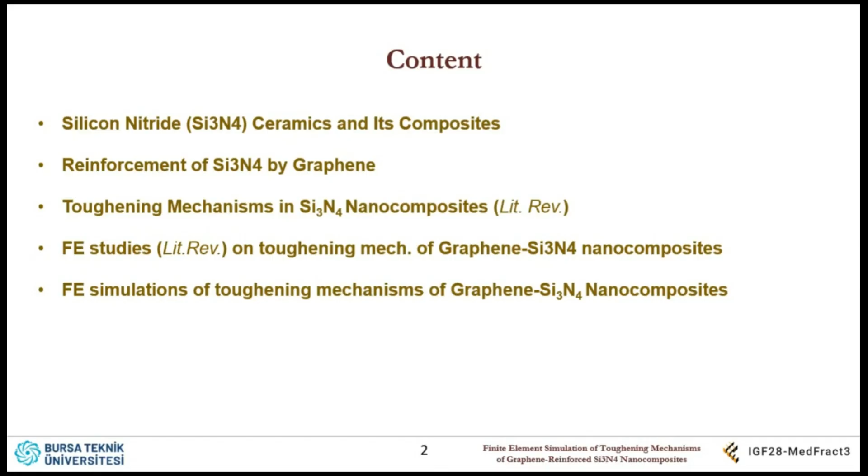So what are the advantages of silicon nitride ceramics? There are many varieties of ceramics, and the advantage of this material is it can be used in high temperature and high stress conditions. Its resistance to wear and corrosion is very good. For this reason, they are preferred in manufacturing cutting tools and internal combustion engine parts like turbochargers, exhaust gas valves, etc., and components of gas turbines, and even biomedical applications due to their long service lives.

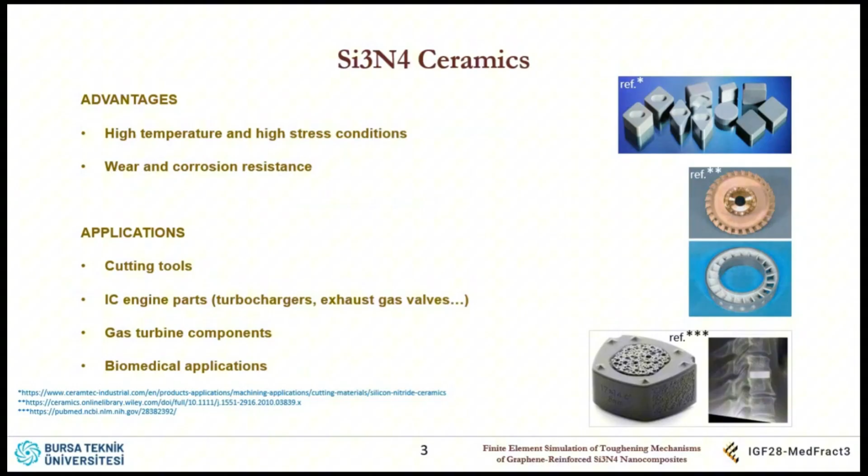So why, if this material is so good, are composites of this ceramic needed? Researchers are always after better materials, so they want tougher ceramic because it almost always has less toughness than metals.

So in order to improve the toughness, researchers manipulate grain sizes. They add some sintering additives, or they add some fillers like fibers or nanoplatelets. When they do this, they get some improvements in fracture toughness.

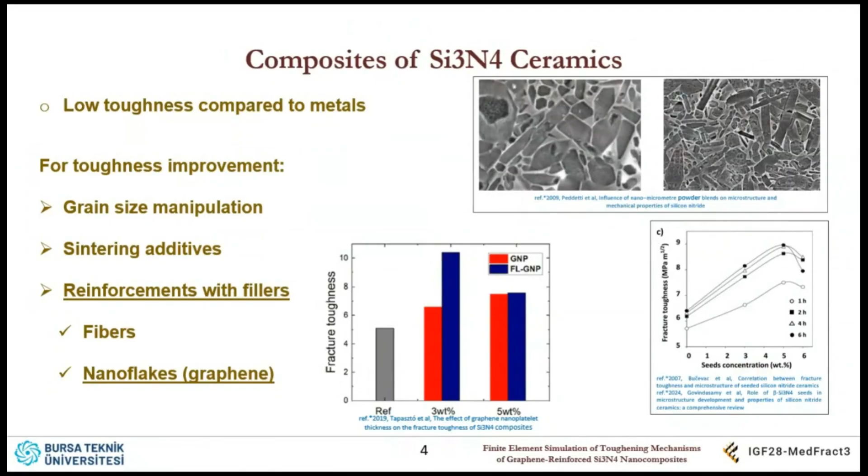However, other mechanical properties may degrade, such as Young's modulus and hardness, while the fracture toughness improves. This is a regular graphene nanocomposite microstructure, so you can see the dispersions of graphene nanoplatelets.

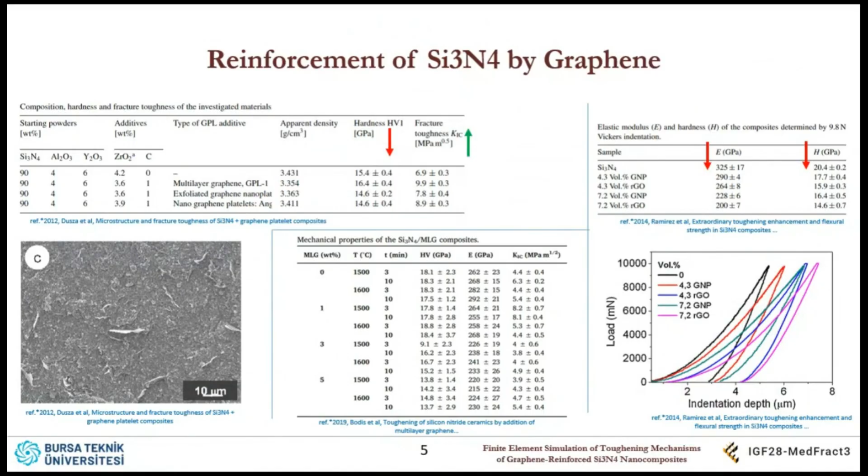In some studies, many different manufacturing parameters are applied, and you can see too many variations in the results. While you get some improvements and decreases in bending strength, you likewise get some improvements and some degradations in toughness. So the mechanical properties vary greatly from one study to another, and this makes material development studies a bit challenging.

In order to help with material development studies, toughening mechanisms should be understood. So for this reason, I want to simulate toughening mechanisms in these materials so that it may help future studies for material development.

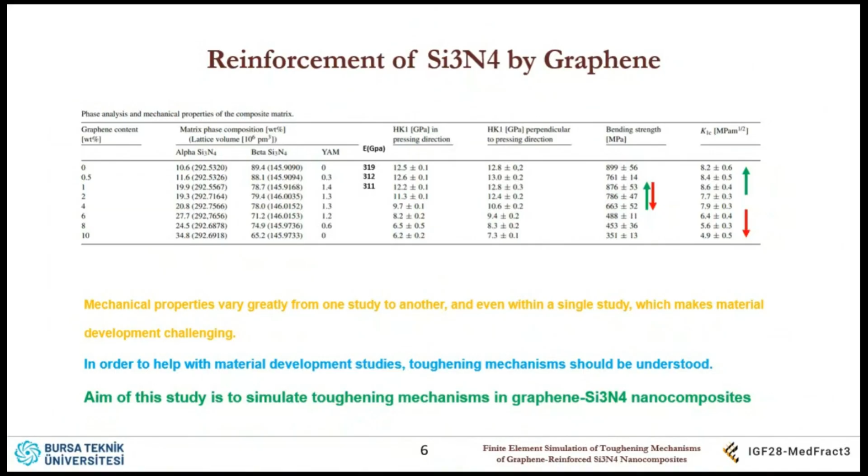I couldn't find any tensile curve for silicon nitride or its nanocomposites, but a schematic plot is given by Kim et al., which tells that monolithic ceramics have almost no plastic region. However, their composites have some plastic region. This is a bit exaggerated - it wouldn't be the same level of ultimate strength, it would be a bit down.

But anyway, with the reinforcements, with the addition of some fibers or nanoflakes, crack path increases due to mechanisms like debonding, bridging, branching, etc.

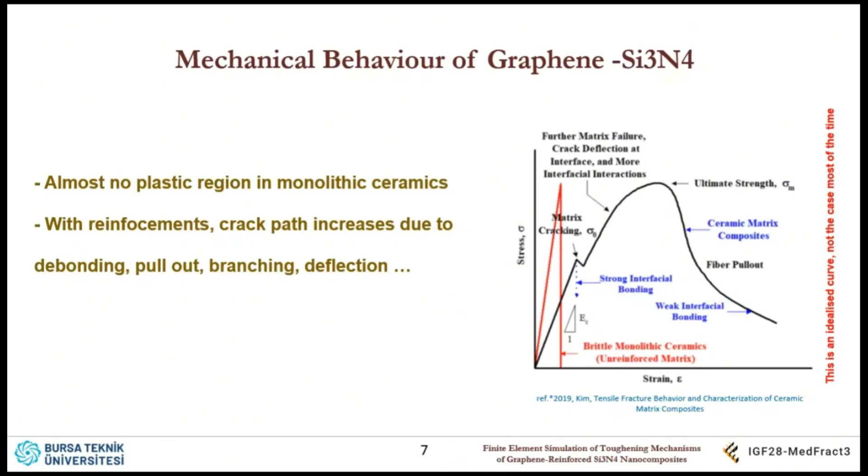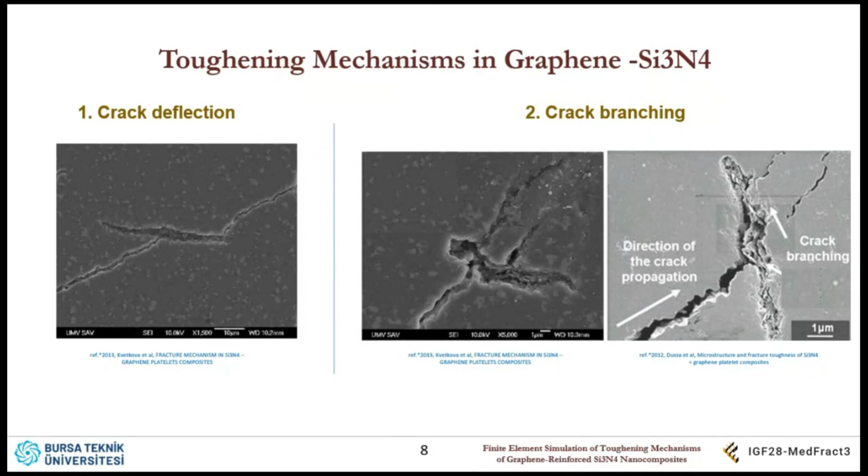So I researched the literature and found 5 major mechanisms. The most fundamental one is crack deflection. Then crack branching - as you see, crack propagates, hits the graphene and separates into two. The third one is debonding of the filler.

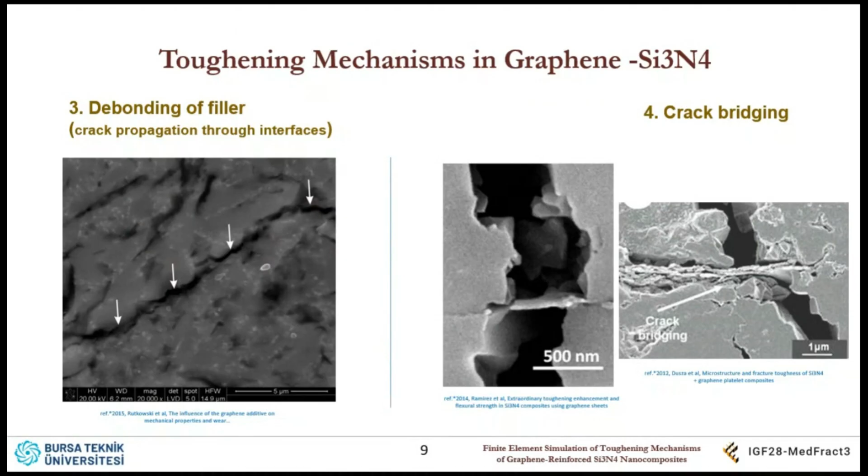If you can notice, this is a graphene, but there is debonding through the crack path. It is happening between the graphene and the matrix. And fourth, crack bridging and filler pull-out. All of these mechanisms help the material absorb more deformation energy.

So what about studies done previously for the simulation of the toughness or deformation mechanisms of these materials? There are few studies, 2 or 3 studies made for this purpose, by Chen et al., and the same group, I think.

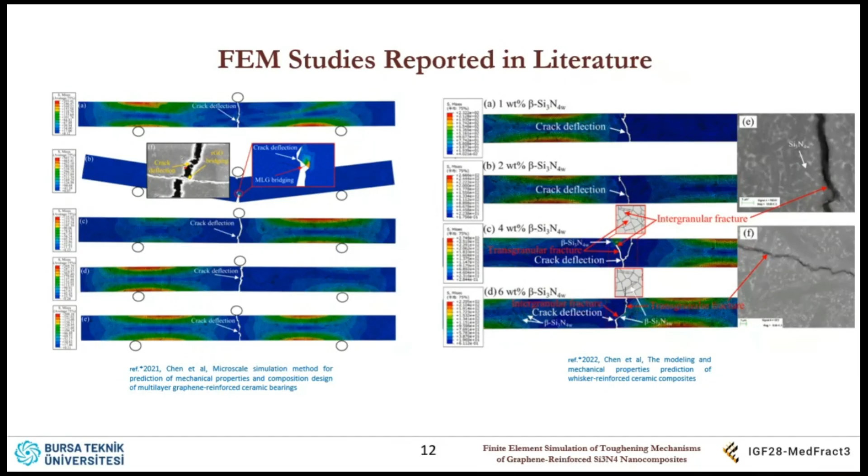They are presenting some useful information - it's good. However, the crack deformation, crack path they could obtain could just provide 2 mechanisms: one is crack deflection, and the other is crack bridging. So there is really a smaller number of toughening mechanisms provided by their studies.

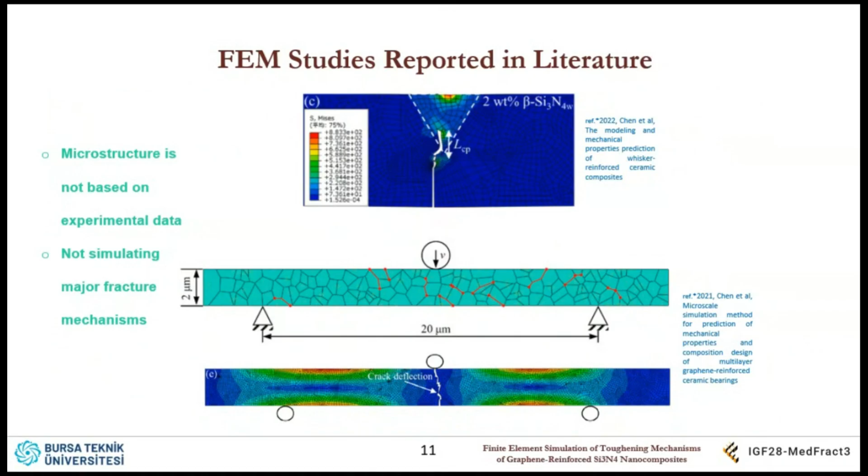Their studies do not incorporate microstructure based on experimental findings, and also, as I said, they are not simulating major fracture mechanisms.

So I wanted to suggest a new approach for this purpose, to simulate the toughening mechanisms. First, find a microstructural image. I have done no experimental work, I don't have any facility for this, I am new to this field.

So first, find a microstructural image - this study provides statistical distribution of the nanoplatelets - and apply it in my models. So I apply this distribution in the computer model. This is zoomed in, and so there is graphene phase, there is matrix phase. This is based on experimental data.

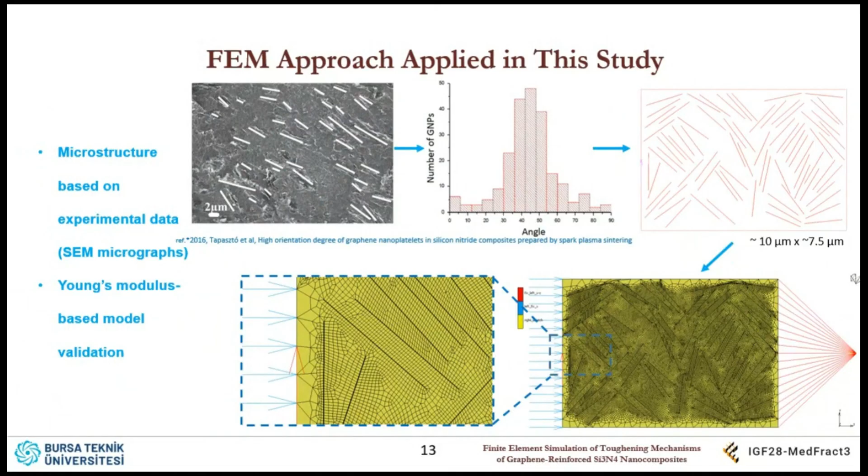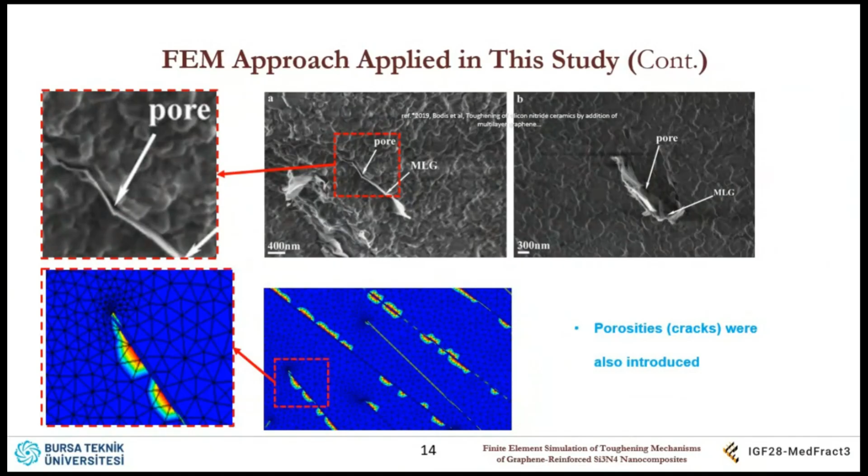I also wanted to incorporate pores. I thought this is important - it might affect the mechanisms too much. So I wanted to incorporate the pores. How I did this is through some discontinuities in the bonding. I wanted to incorporate this - they work like sort of pre-cracks.

I also collected some other data from the literature, like the elastic properties of graphene, likewise that of the matrix, and some other microstructural data like thickness and average length of graphene nanoplatelets. The average length was found to be 2 micrometers, average thickness about 10 to 15 nanometers.

I also used the properties for the microstructure and for mechanical properties. These are 2 different studies, but they were manufactured in almost the same method using spark plasma sintering, about 5 minutes sintering time on average. This is the sintering temperature and pressure. Since they're produced in almost the same way, I thought I could combine these 2 studies.

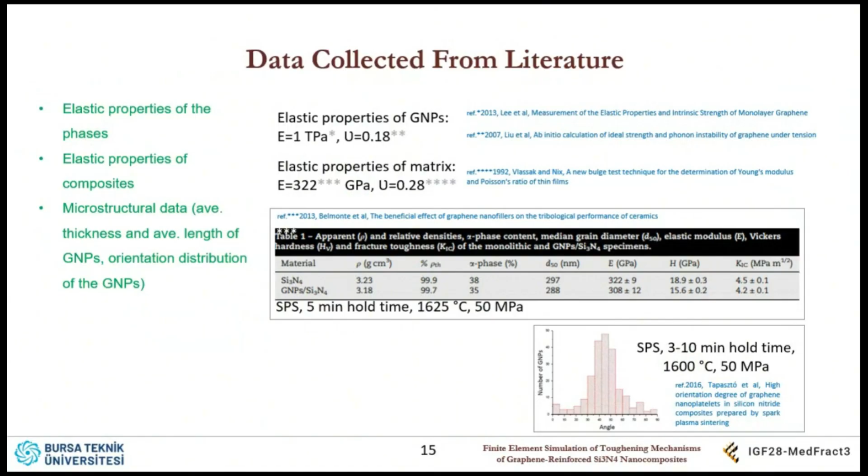So I created 2 classes of models: one is tensile test models, the other bending test models. Tensile test models have 2 phases, one is matrix, the other is graphene.

For the bending test models, in order to make them less time consuming and faster in the computer, I didn't define graphene all across the body. Instead, I applied composite material properties in the surrounding area, and graphene at the center where potential cracks will happen, since higher stresses occur at the mids and there won't be cracks elsewhere.

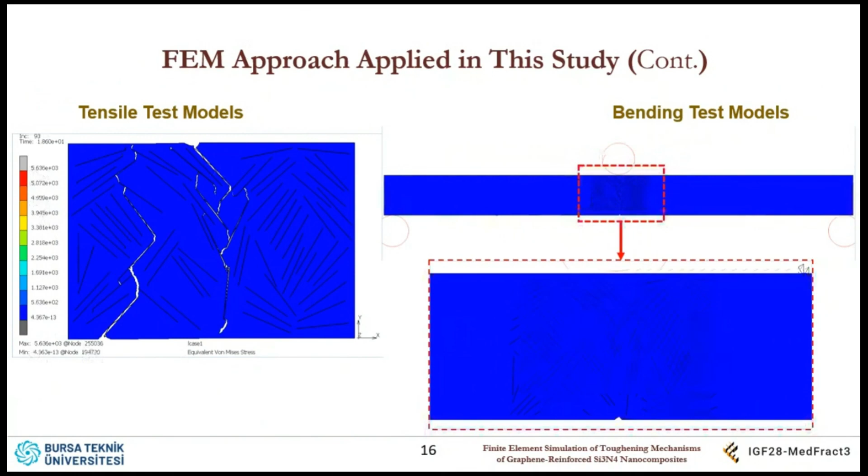So there are subclasses of tensile models: TA, TB, TC - 3 basic models. Tensile A doesn't incorporate any interfacial properties, it just assumes graphene is firmly connected to the matrix. The second model, Tensile B, incorporates interfacial properties.

These are like this: normal strength threshold is about 400 megapascals, shear strength threshold is 70 megapascals. In the third model, in addition to these, I applied pre-cracks in the interfaces.

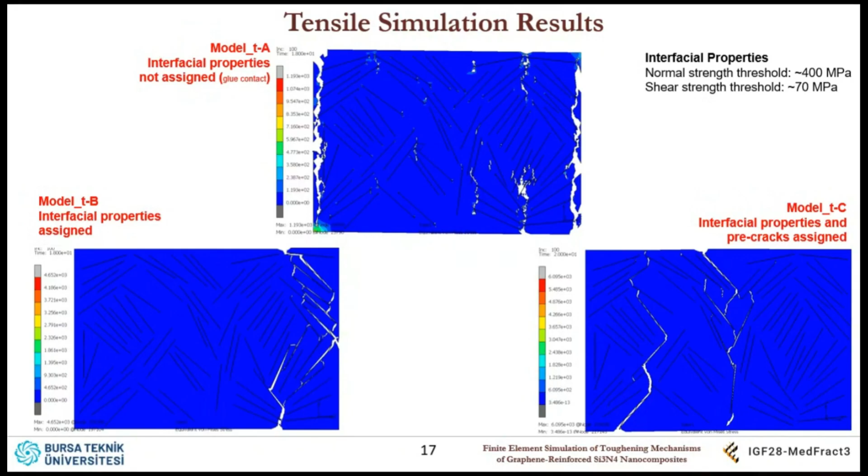The findings, the results are like this - these are zoomed in images. In the model with no interfacial property, like firm connection between the faces, you see the cracks are straight. In the other models, we see more realistic crack paths. But when we compare these two, this has got longer crack paths, therefore improved toughness.

And these are the force displacement curves. This one represents the one with porosities at the cracks. And when there's no interface effect, this goes even higher - so no toughness there, just very little toughness.

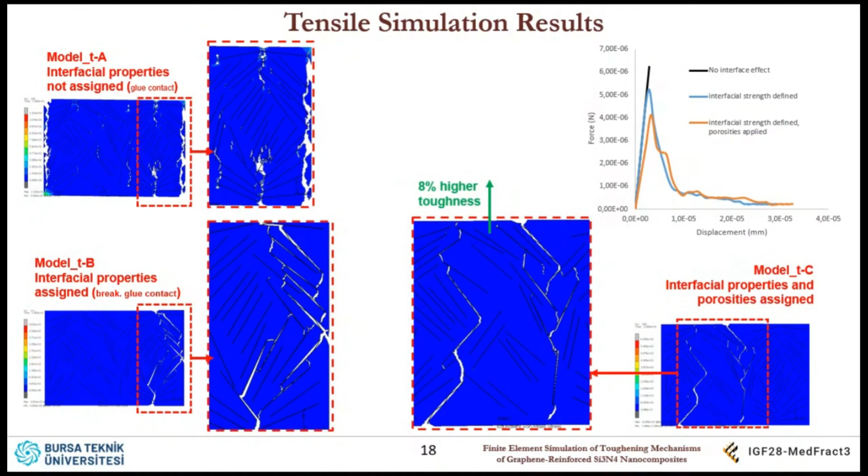As you see, this is an experimental result - this is monolithic ceramic. The crack path is very straight, but here it is like zigzags, so this model is not valid. There should be weaker connection between the graphene and matrix than the connection between the grains of ceramic. So this study supports the information also given in the literature.

And this is for bending simulation. Similar crack path is seen - this is straight when the interfaces are perfect, but when we apply weak interfaces, we get these results.

But this one again has got more zigzags. You see, this doesn't jump into the graphenes very well, but this one just touches it, deflects, touches, deflects. And also there's some branching here, but not here.

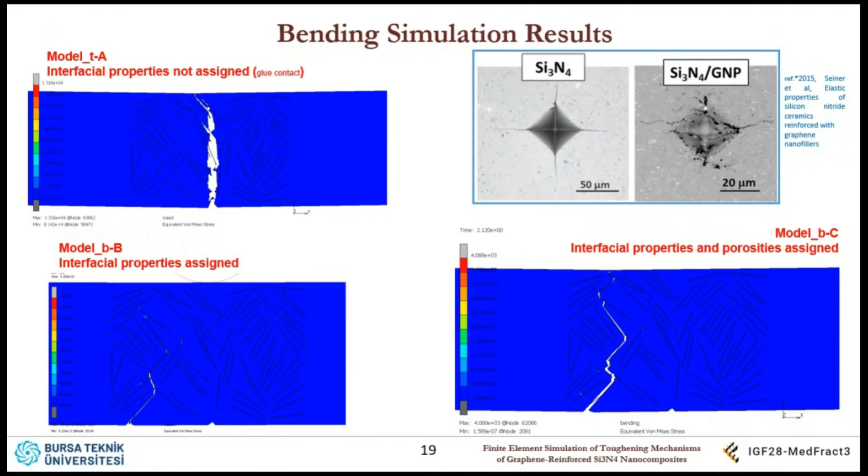So these are zoomed in images. This looks more real compared to this. So these results tell us that porosities have a fundamental effect on the mechanisms.

These are the comparisons of bending force displacement plots of the bending simulations. This one has got higher toughness, as you can imagine.

When the toughness mechanisms are compared, I could simulate almost all mechanisms. As you can see, crack deflection - crack comes in, hits graphene, and is directed. And here, crack branching - a crack path propagating, here there's a graphene, it hits it, and is directed this way and this way, likewise this way and this way. So crack branching is seen.

And debonding of the filler is also simulated. Crack bridging is not so apparent - I may not claim that this is crack bridging, but partially. And also the filler pull-out, as you can see, the filler is pulling out, and when it's happening, it is absorbing energy.

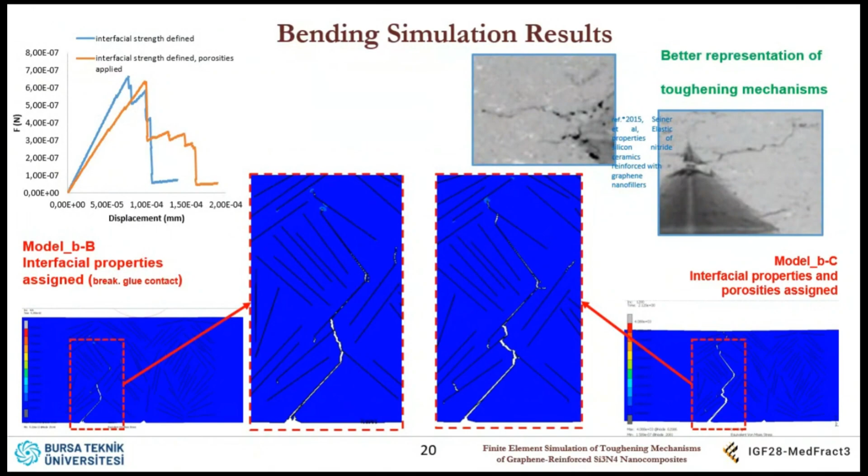But the experimental studies say that this reduction is due to the waviness of graphene. In fact, there is not much waviness in graphene - if you look here, they are almost always flat. So this one, single graphene, is wavy, that's correct. But these are multi-layer graphenes, and when many layers of graphene come together, they tend to be straighter.

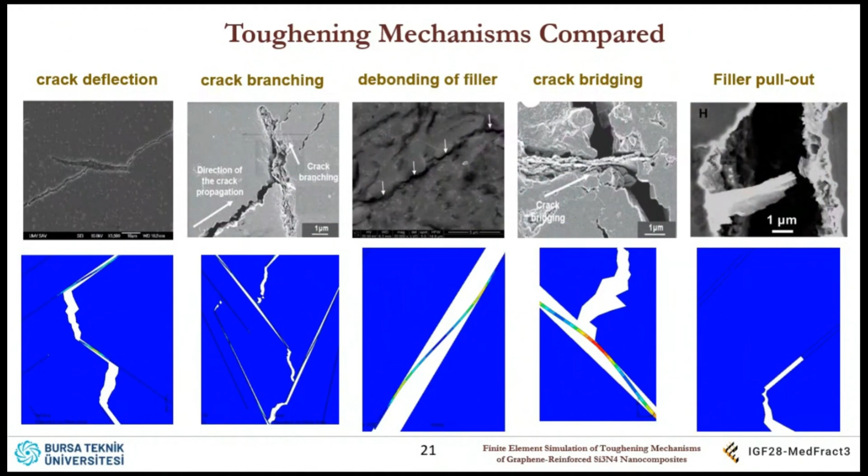So this hypothesis given in the literature, that reduction in Young's modulus and hardness is due to the waviness of graphene - they claim this, but I show that this is due to the porosities. Almost all toughening mechanisms I could simulate by taking into account the porosities and interfacial characteristics, and also orientation distributions of graphene.